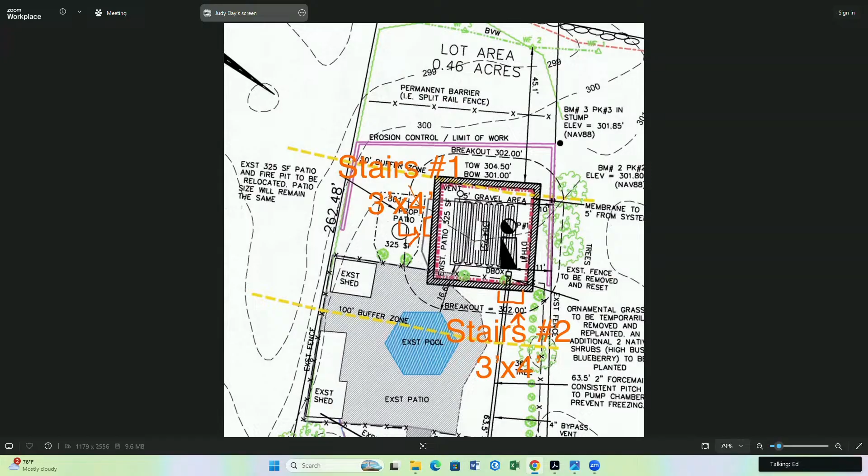All right, next up, let's see, it's 7:09. And I do see that we have Mr. Petrosi on the line, and we put him first on the new hearings agenda here tonight. So let's go ahead and open this one up, Ted, if you don't mind.

Wall Street Development, 12 North Mill, notice of intent. The Hopkinton Conservation Commission will hold a public hearing on Tuesday, May 19th, 2026 at 7pm virtually online to hear all persons interested in a notice of intent filed by Wall Street Development Corporation to construct a new single-family home, driveway, and associated site work. Location: 12 North Mill Street, Assessors Map R19, Block 23, Lot E.

Thank you, Ted. So I'll just give a little background on why we're re-advertising and reopening this hearing, because it had been a continued hearing for quite a while - I think over a year, with at least 10 hearings, and we had changeover of commission members. We had 2 members who hadn't been present for more than half of the meetings, and I think we only had maybe 1 or 2 members that had attended at least 9 of the meetings. So given the length of time, Town Counsel had advised that this be re-advertised and reopened so that everyone could vote on it and get updated, both the abutters and the commission members.

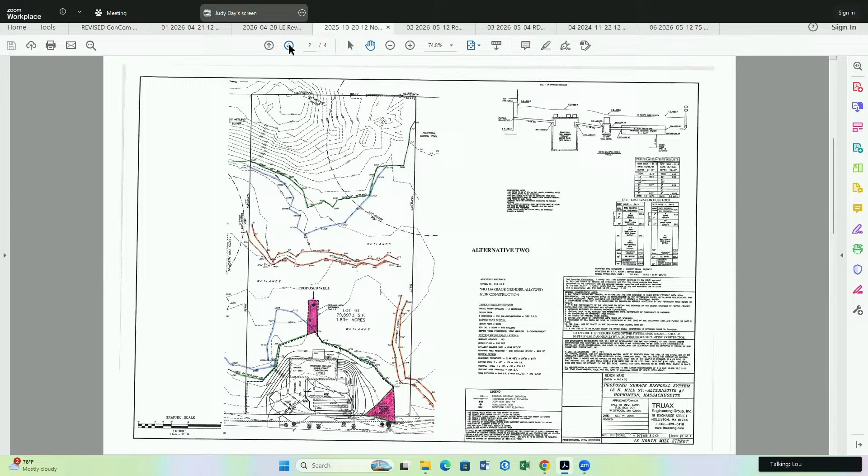During the process, we proposed some alternatives that had the house, the septic, and the well all proposed in different locations over the course of time. We eventually filed an application for a variance with the zoning board to allow a setback from the street to be reduced from 60 feet down to 30 feet.

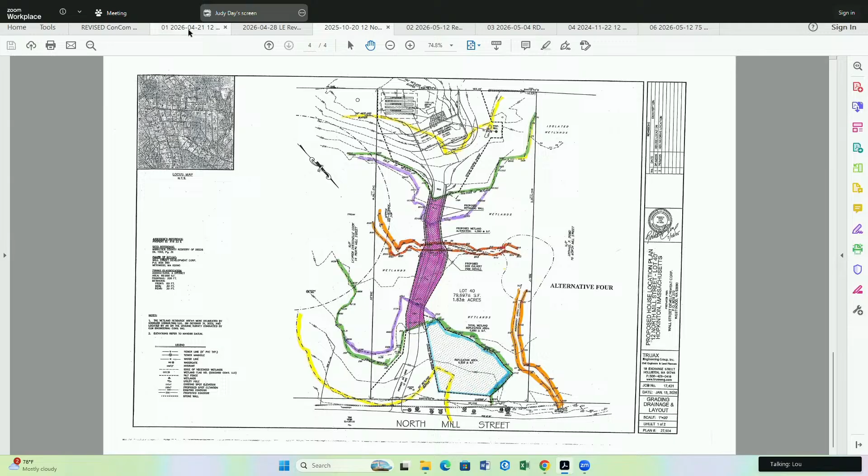And also we were able to determine that we could locate the house, the septic, and the well in the front portion of the lot without crossing the wetlands, leaving the remaining portion of the lot undisturbed, without altering any resource areas beyond the existing portion of the property along North Mill Street.

However, that required us to comply with the regulations related to setback of the septic system from wetland resource areas, setback from the street, and the location of a well, and also to be able to replicate the wetlands with the required 1.5 to 1 ratio.

So the current plan that will hopefully be considered tonight is to locate the house, the septic, and the well within the front portion of the property, with replication equal to 1.5 to 1, leaving the remaining portion of the property undeveloped or undisturbed.

This proposal, although it complies with the Board of Health regulations for Title V septic systems and the setback from the street of 30 feet with the variance from the zoning board, would still require a waiver of the Board of Health regulation for setback of a well from a wetland BVW. That application will be forthcoming, or filed with the Board of Health, once we have the blessing of the Concom vis-a-vis this proposal that's on the table right now.

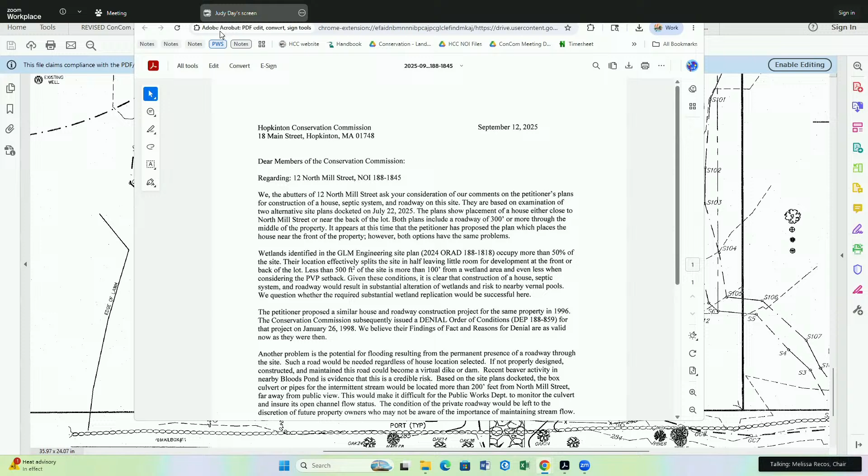I will open it up now then for additional public comment. Does anyone from the public want to share comments at this time?

Bruce Umgren, 9 North Mill Street. Judy's assessment of that letter is accurate. Many of us are concerned about the intermittent stream. The current plan appears to avoid the stream entirely, and presumably the wetland replication would not affect that stream, although that's an issue I'd like the Concom to address.

Also, as part of this presentation, I think Mr. Petrosi had talked about including a deed restriction to eliminate or prevent any future construction on that property if this plan were to be accepted. Is that true? That was the proposal, yes. A similar restriction that was on the adjoining property to the rear has a similar restriction, I don't remember the exact wording, but it's to keep the property in its natural condition, let's say.

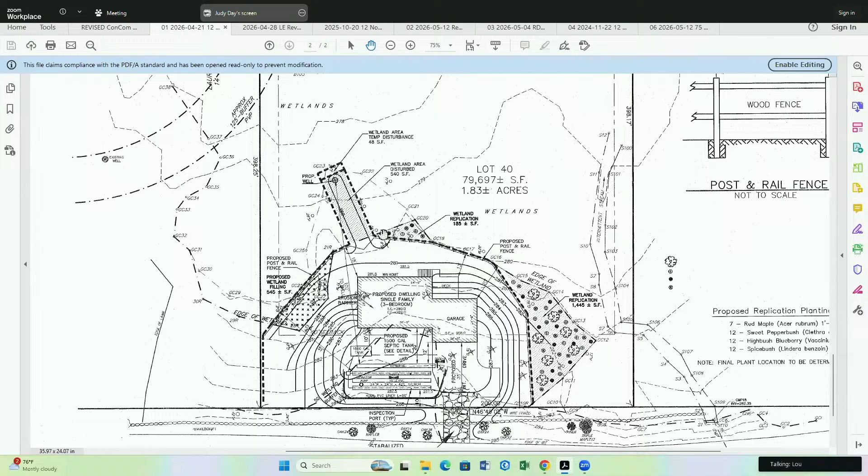To answer the question, I'm not quite sure. That would be probably everything from the wetlands back, I would imagine. We're not going to be able to go beyond the post and rail fence, so it's everything else on the property that we're thinking. I'd have to look at the wording of the adjacent restriction, but I can't imagine somebody going back there and doing other things.

They'd have to come back to the commission. Yeah, I think it's a little bit of a formality, because I don't see how anything could be done back there. So if we say north of the proposed edge of wetland line... well, if that's west, but yeah, if anything, people would walk back there for passive recreational type activities. I can't imagine anything else going on back there.

All right, a condition. I think we should have a condition to incorporate any of the wetland checklist items that are not already included in the wetland replication protocol, so those get merged into the protocol. Does that make sense? So if it's not already in there, it gets merged in based on our checklist.

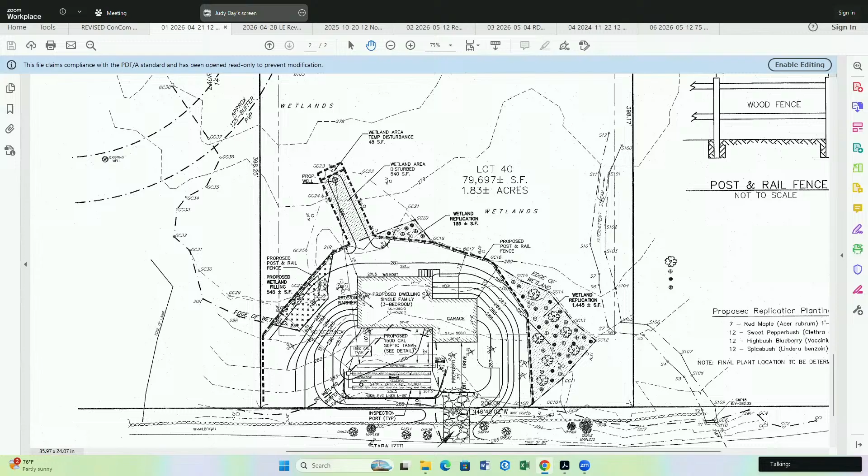Thanks, Ted. You're welcome. Let's see, do we have someone representing the applicant on the line to present this? I am the applicant, Steve Doucette. Welcome, thank you.

Do you want to give an overview of your project, or do you want Judy to? Either way, he kind of summarized what I got going there. I'm going to connect the house to the sewer, so that's just collapsing the holding tank. We're not touching the distribution and the leaching fields; they remain intact because they're right up against the leach fields.

I don't know if you have the plans in front of you. I don't think I can scroll for you, but you can see where the tank is and the disturbed zone that goes around. That disturbed zone includes the sewer going all the way from the back of the house, all the way over, and including running a sewer stub to the barn, because ultimately I'm going to try to put an ADU above the barn. So I've submitted plans here to do the septic, put a carport in, and attach the barn.

Once I get this approval, I'll proceed to design the interior and submit those with the building commissioner. I thought initially the historic commission would be a big hurdle to get over here, but apparently they're not too concerned with what happens on the inside. So I didn't spend any effort until I got approval for these exterior modifications that summarize any impacts to the wetlands.

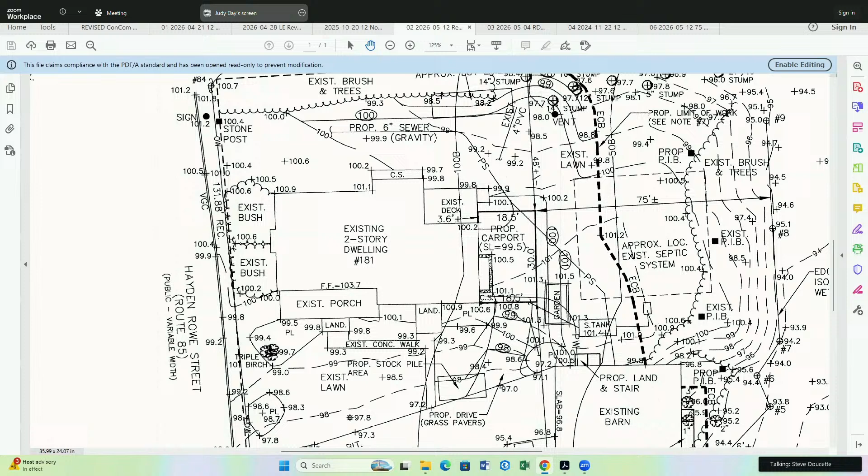It's coming off the roof before it hits anything. I'm asking an honest question because to me it would seem like if it's wetlands and it's dry all year, do we want to help replenish it occasionally?

Yep, Melissa, go ahead. Yeah, roof runoff is clean runoff. So preferably, given you've got the yard area and it's relatively flat, if it works well with the final design of the carport to have the rainwater sheet flow through that yard towards the wetland, that would essentially be a qualifying pervious area or a filter strip. Single family residential homes don't have to meet the stormwater standards, but that would essentially be compliant with water quality and recharge standards.

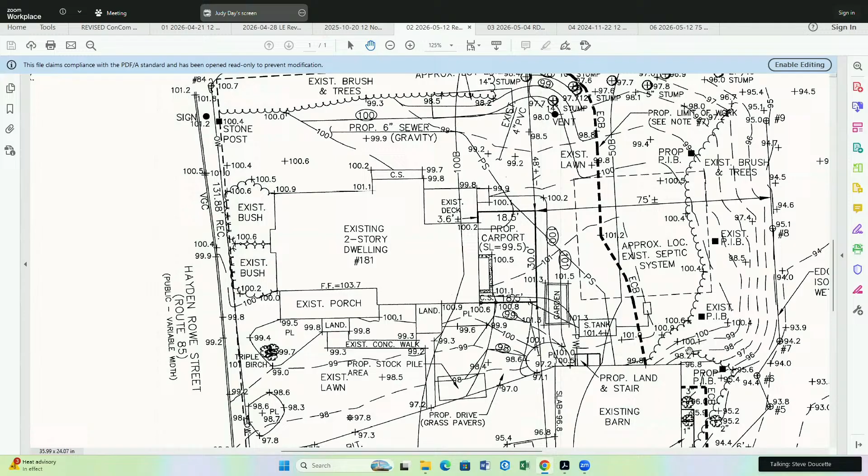I think that's just a drain pipe, so I can't go into the non-disturb area to do that. If you scroll down a little on the plan, Judy, where those trees were cut down, that is all lower area. If I just run runoff into that area, it's going to flow back.

Yeah, I think that all sounds reasonable. Right, so we'll show... but at this point I still have to stay on the left side of this black line.

And if it's all lower, it wouldn't take much to bury a drain pipe out there. Would you rather have it go further back and disturb a little bit, or not disturb and let it flow naturally? I don't think we're asking for a pipe. I think as long as it's hitting the grass pervious area, like Matt said, that's what we're looking for. Yeah, all right, in the front we might have to think about it a little bit.

Okay, all right, then can we go? And then the only other thing, again, you had asked about those gardens. One garden is dead in weeds and hasn't grown for 10 years, with rotting plants and rotting boards and the rest of it. That will go away.

I have no intention of replacing those. It was literally, I think, at one point a vegetable garden, but it's gone to weeds, and there are mostly just raspberry bushes sitting in the other, with landscape timbers going up alongside. It's basically raspberry bushes, and at some point that egress coming down out of the barn may go right over that area. But literally, I don't know that there's anything there.

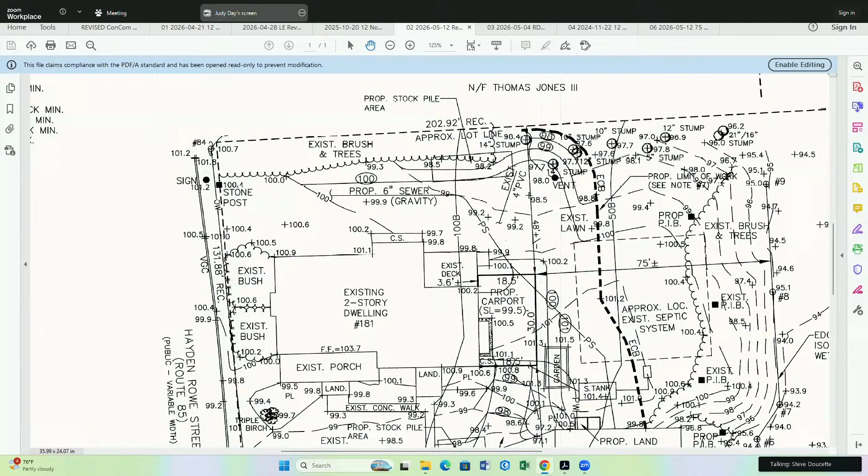So do I need to submit another notice to the public? Nope. So we'll just show up at the meeting on the 9th, and hopefully we'll have everything in place by then. Yeah, you'll just want to provide your updated plan set in advance of the meeting so that we have enough time.

I spoke with Dave, and he got stuck on a plane. His plane failed him, so otherwise he wasn't here. So we talked about all this. We'll get it all done and submit it, and hopefully everything will be in for the next meeting.

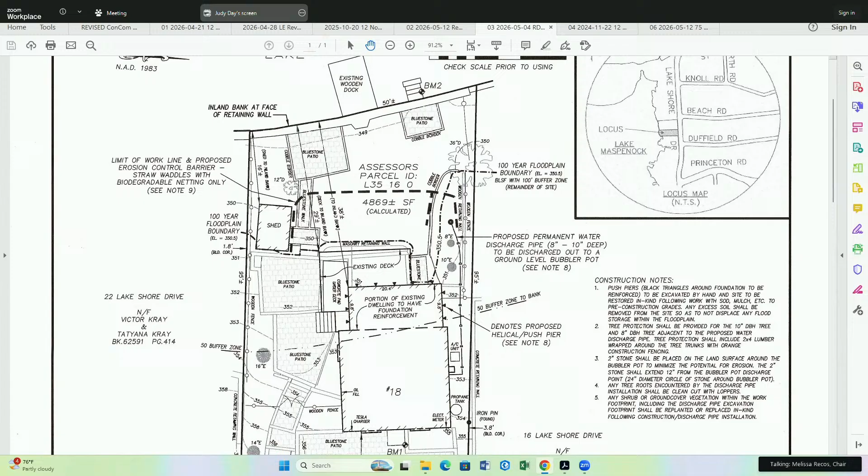All right, next up we have 12 North Mill Street development continuation for the soil testing access. I think Mr. Petrozzi left the meeting. Mr. Petrozzi has left the building.

Through the chair, can we just vote to continue it just to stay until we figure out what's going on with that, and he'll either withdraw or move forward on this application? I'd like to make a motion to continue the 12 North Mill hearing on access for soil testing. Can I get a second? Through the chair. Yes. Could you please specify a date for that?

Continue to the 9th. I'm happy with that amendment. Keep my motion. Second. Oh, I think that was Ed.

All in favor, Jim? Aye. Ted? Ted is an aye. Ed? Aye. Walter? Aye. Matt? Aye. And I'm also an aye.

All right, next up we have 75 South Street, amended notice of intent continuation. Let's see, Judy, do you want to, I see Joe's on the line too. Who would like to take this to present? Gersh.

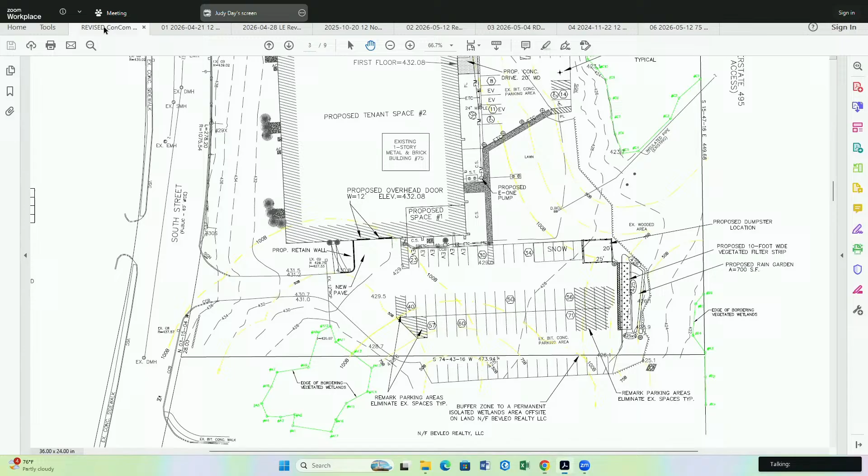So again, thanks, Joe, for your work on this. Appreciate it. Yeah, thank you very much. All right, got through that continued hearing list. Now we're back down to work session items. So we have Charleswood School dewatering update.

Judy, do you want to kick this off? I know it looks like we have some members from the school team here as well.

Through the chair, for other commissions' benefit: Melissa, I, Anna, Chris Eberly and Chris Kenny from Vertex met with town council regarding last meeting's discussion about dewatering and discharge from the Charleswood School project site onto the Conservation Commission owned property at 0 Briarcliff. There were a few discussion items from that conversation that the Vertex folks were planning to bring back to the school building committee, get their thoughts on, and come back with an update. I believe they just met earlier today and are here with an update on their next steps as a result of the conversation with town council.

I'm happy to provide any additional details, or Melissa, if you'd like to pass it over to the school committee folks, let me know. Yeah, we can turn it over.

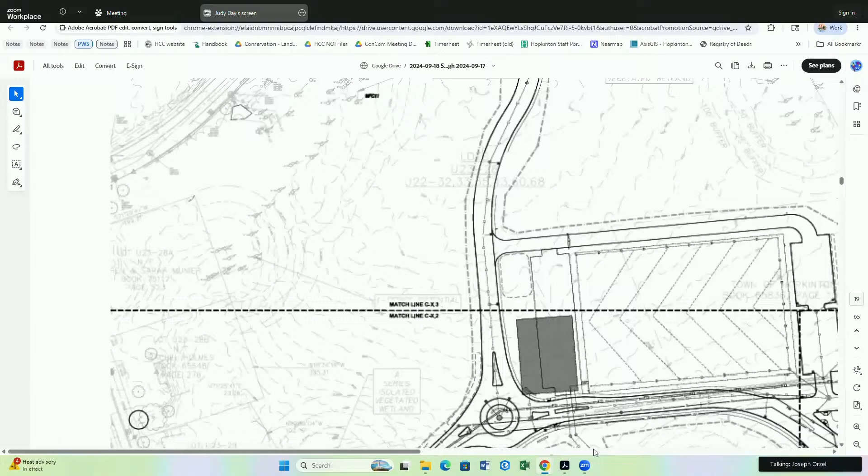It's still a wet time of year, but I think that is largely due to the amount of water being pumped and the impact on the groundwater table. At the time of the site meeting, it was anticipated that pumping would continue for about one more week. We were out there on May 7th, and based on the discussion I just heard, the pumping is still continuing.

Our opinion on the one week duration of pumping was that it probably would not have any significant impact on the existing trees and vegetation. We're getting into the period where trees are leafing out, and they're going to start pulling out some of that groundwater and transpiring it. However, we also recommended that if the pumping continued longer than that, it may warrant some ongoing monitoring.

Just to make sure there is no impact on the vegetation. I don't know at this point what the anticipated date is for the end of the dewatering, but since it's been over a week and a half, it may warrant another inspection, checking the groundwater level with a hand auger to see if it's still as high as it was or if it's gone down. After the rain today, it's probably up again, but that should be looked at, and I'd like to know the anticipated schedule to complete the pumping at the site.

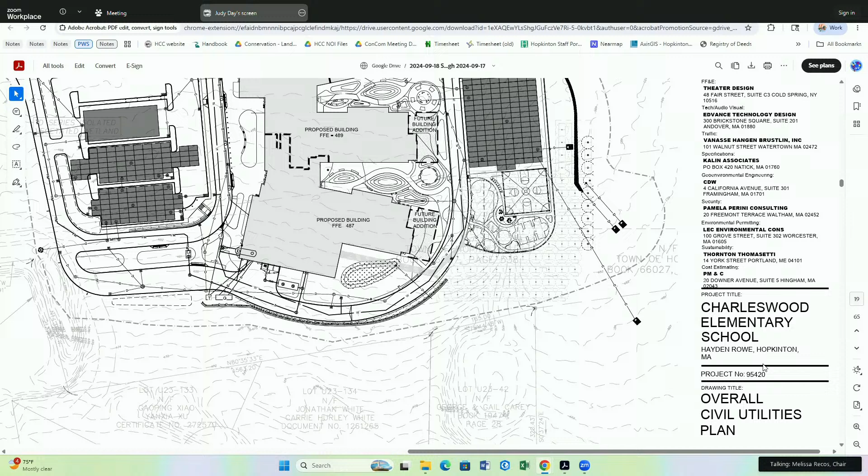You're talking about the area that was cleared? Yes, that's fenced in, and I walked out there. Ted accompanied me as well, and we saw that the erosion controls were still in place within that fence line area. So they do have some erosion controls still out there since it's not stabilized, like you said. I think it makes sense to keep those in place until the restoration work is done, or whatever we decide for restoration.

Okay. It's not the end of it, for sure. As Chris mentioned, the school group is going to come back with a restoration plan that we can discuss at a future meeting.

Through the chair, yes. I think there's ongoing discussion about the restoration plan and what's necessary in that area. I don't know that we have a count of how many of the trees that were cut were on conservation land. Again, just to reiterate, this wasn't a rogue action by the design team. We permitted this, and it was later raised by a resident that the permitting process that was gone through was flawed in terms of the conservation property.

So I just want to echo that sentiment: while the contractor's responsibility for dewatering has been poor, the overall intent of encasing this area and identifying it as a place for discharge was part of the permitted plan. Now that we've identified the potential conservation issue, raised by the resident, we are pulling it back and mitigating it. I want to echo to any viewers out there that the project was not acting irresponsibly by pursuing this — we were doing what we said we would do as part of a permitted plan.

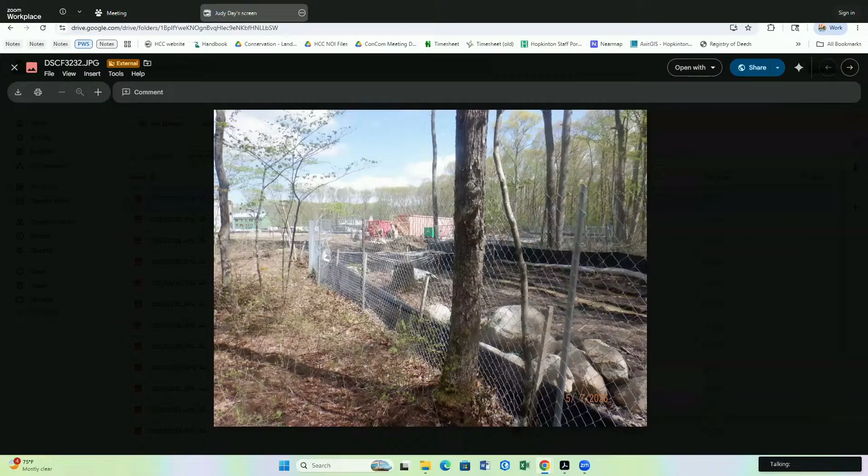All right, wow, look at that. Took care of all of our agenda items. It's not 9 o'clock yet. So let's just jump to the conservation minute. There's a couple things here.

Judy, did you want to talk for a minute about your application checklist revisions? Sure, and I'll be mindful of the fact that we're finally getting out before 10, so hopefully this will be quick. I've put several track changes docs of our four permit application checklists in the public folder, in the work session folder. Through reading Joe's reviews and doing intake of applications myself, I noticed we tend to be missing the same couple of things. All of the checklists look different, different fonts, some of them are kind of messy, and the ANRAD one was a mess. So I took a look through all of them, tried to standardize and clarify requirements, and added the ones that seem to be missing that we ask for every time. One of the bigger changes is just switching up the colors we ask for with the color plan set, because I don't know about you guys, but I cannot look at another yellow line. So I'm trying to make that a little bit more clear.

Since they're referenced in the regs, I think it's best to have them reviewed by the commission and give you guys a chance to provide feedback. If not today, eventually it'd be great to have a vote to approve the changes I'm proposing. I think this would mostly affect myself and Joe looking at the original applications, hopefully getting you guys better quality applications in the end, but it shouldn't really affect your process too much.